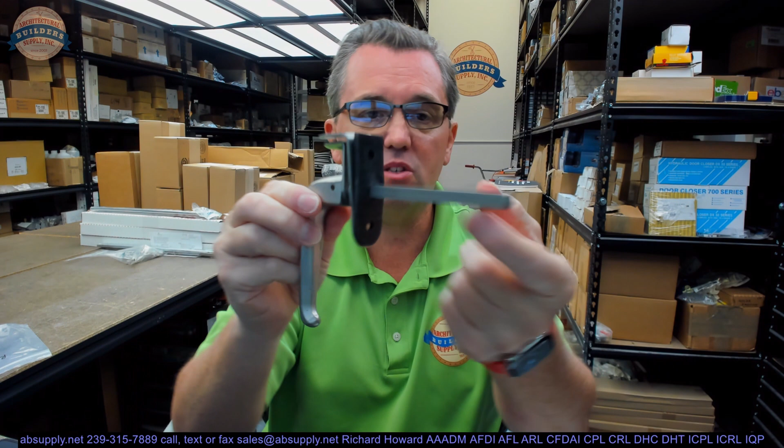The exterior handle is going to be comprised of the handle itself, obviously. It has a roll pin through it into the stainless steel key stock or shaft. That has a specific length for the two-point latch application, where other units, this could be also known as an RPRS8SS or -1. The only difference between this and an RPRS8SS is simply the length of the shaft.

This is going to be right at about 5-inch shaft length, and that's what I'm calling it, 5-inch shaft length. Generally from the end here to the end, which is buried, of course, inside of the handle, but about 5/16 over from the roll pin. So about a 5 5/16 shaft length.

Admittedly, the factory is a bit, I wouldn't say cagey about publishing the information, but without asking, we don't know where this is used, although they supply that information upon request. The key stock diameter is 0.312 by 0.312, so 5/16 is the key stock size. You can, of course, padlock that from the outside.

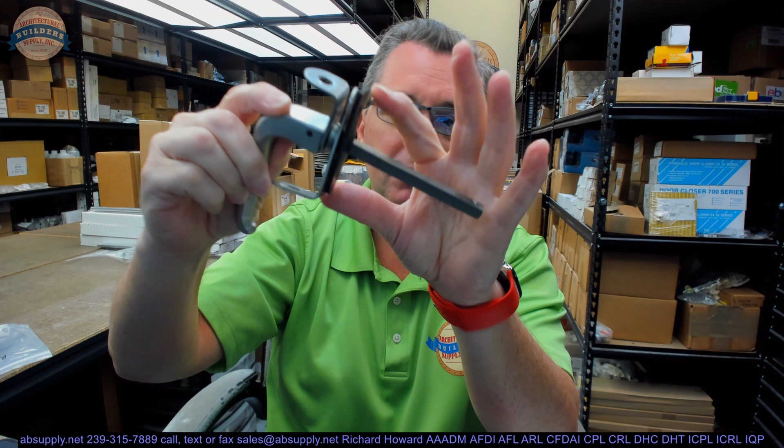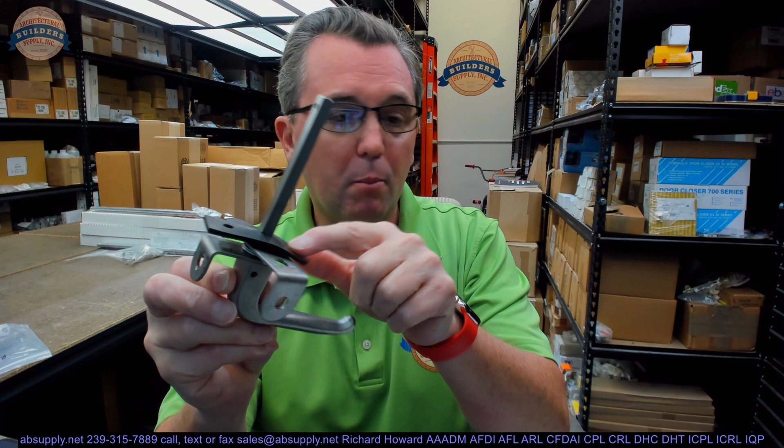There is a rubber gasket that is available separately as well. That might be an SD30. Let me look up that part number, see if I recall it correctly. Indeed, it's the SD30, and it is not uncommon for people to purchase the gasket only. That's just closed cell neoprene. It fatigues, it fails like everything else, and is something considered to be replaced.

We'll of course include the interior handle, and that will have a roll pin started in it, and you will get that pushed down into that hole that's been prepped there. The other item that is included in this assembly would be the fasteners. We've got a couple of hex cap bolts and a couple of washers.

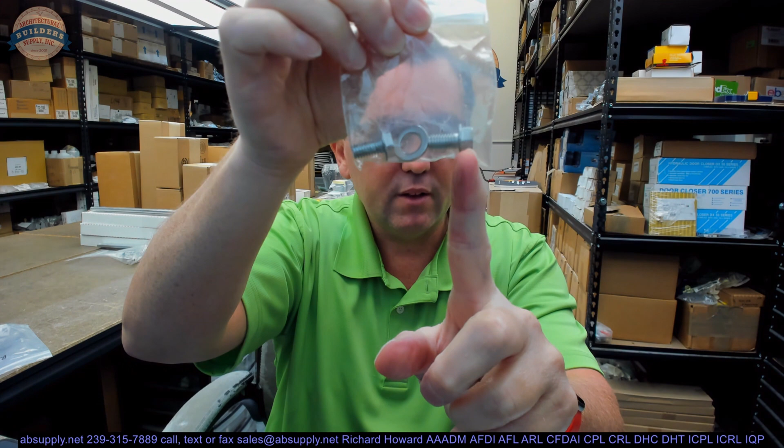Please note you have a thinner head and then a thicker head. The thinner head is going to be down in this area where those staples have to pass each other. The thicker head can go over here. That's how that works. Let's switch now to the screen view and take a closer look at the photographs and the supporting documentation.

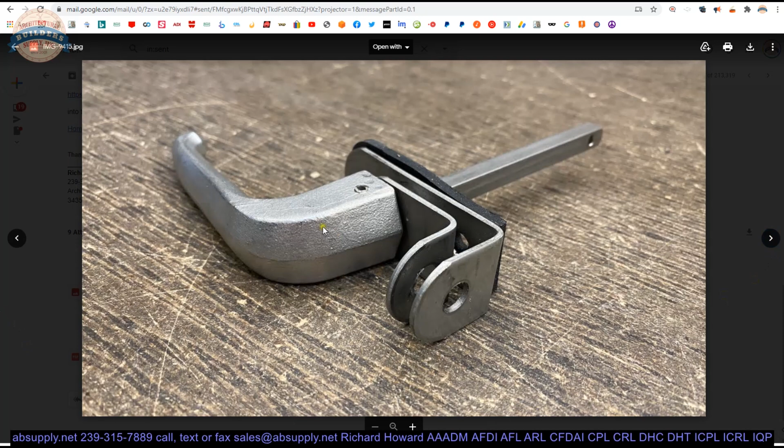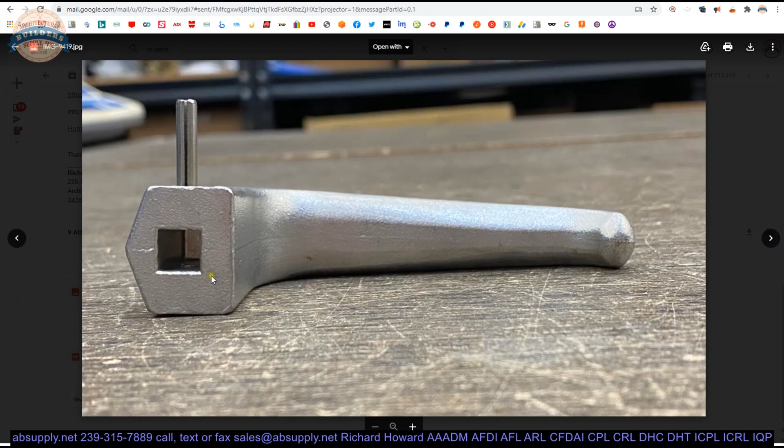Here is the item that we are looking at. The complete assembly, showing the handle, the roll pin, the gasket, the two hasps or staples, the SD30 gasket, the exterior only, the interior only, with a key stock and its roll pin, your screw fastener, the thicker head and then the thinner head.

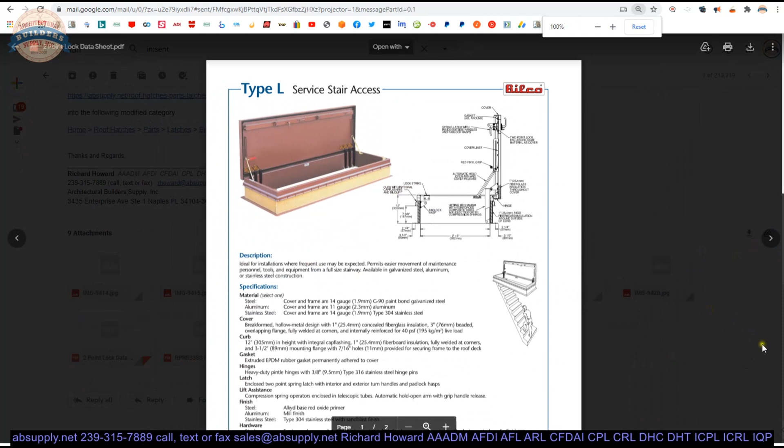Now, the L service stair access would be a typical application for a two-point lock, and here it is. So this assembly is going to be different than the typical RPRS8SS, and the difference really is just simply the shaft length.

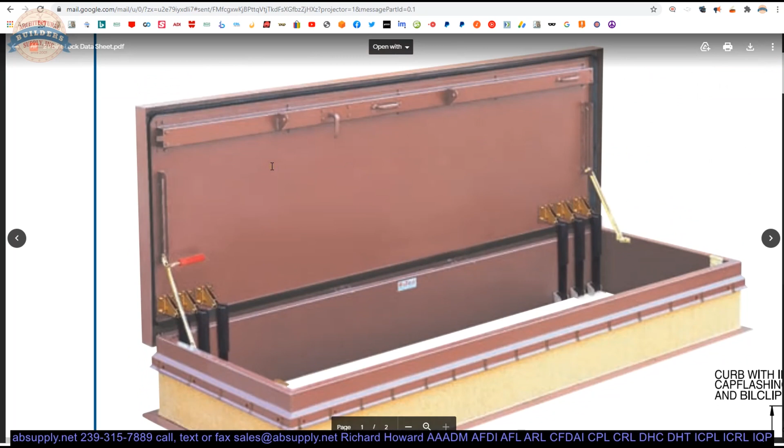Okay, so if you have a two-point latch, this is very likely the one that you need. How you'll know if it is for sure: if your unit is aluminum or stainless, this could be it. If your shaft length of the one that you're replacing is 5-inch, this would be it.

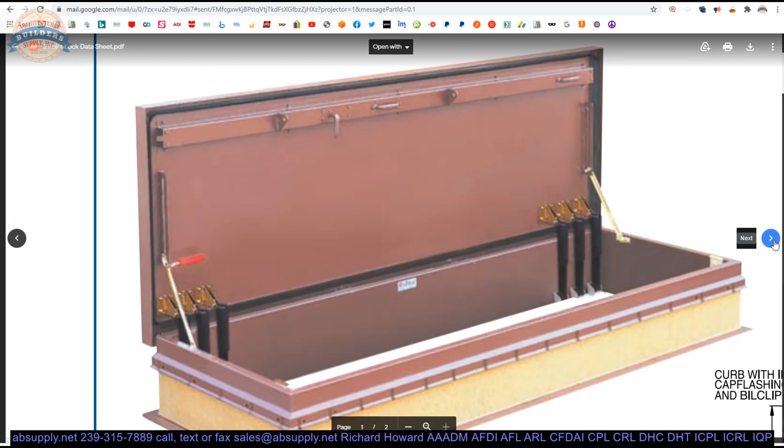Unfortunately, they don't produce a bill of materials for all of the hardware that goes on each and every one of their units. I really wish they did, because it would allow us, just upon knowing what unit the client has, to fulfill orders for correct, proper, original equipment as replacement parts. But unfortunately, they don't offer that.

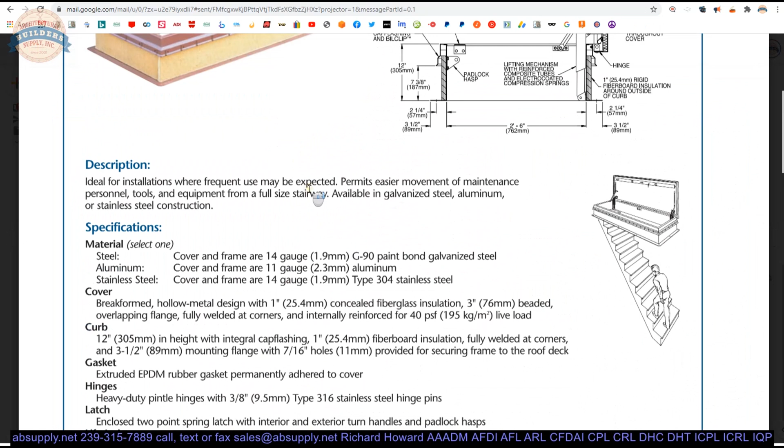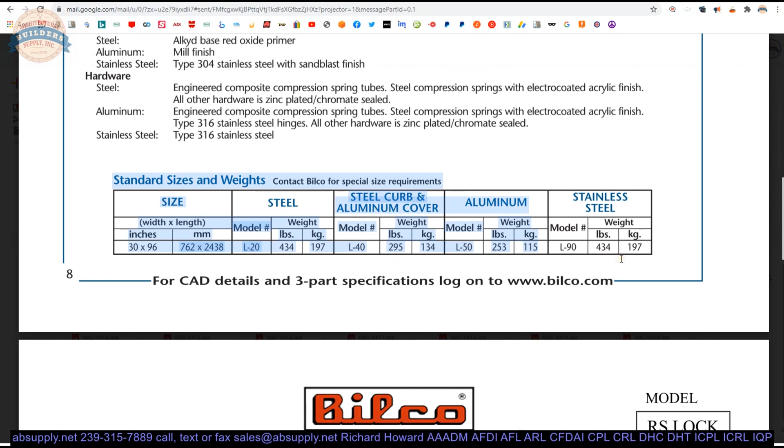Okay, this is the L shape, or the L style, made of steel, aluminum cover, stainless steel cover, the L series. The part number changes as the lid composition changes as well.

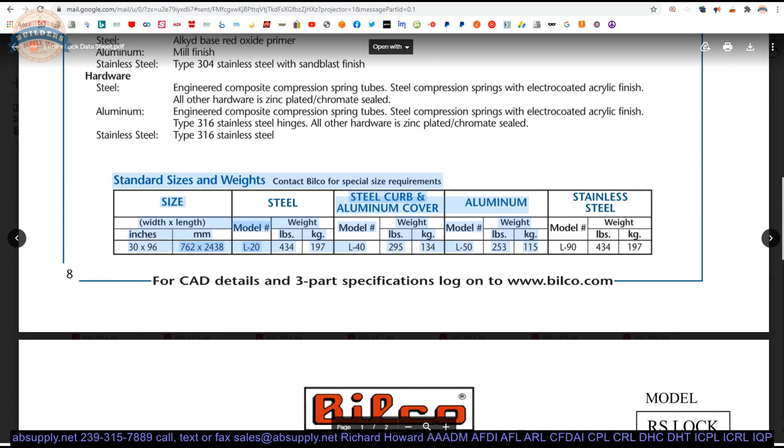Okay, and on page 2, a little bit of information regarding the 2-point latch. There's also the installation instructions that the factory has provided for this. They don't really apply directly because this is a 2-point latch. That's a RPRS7 that you see there.

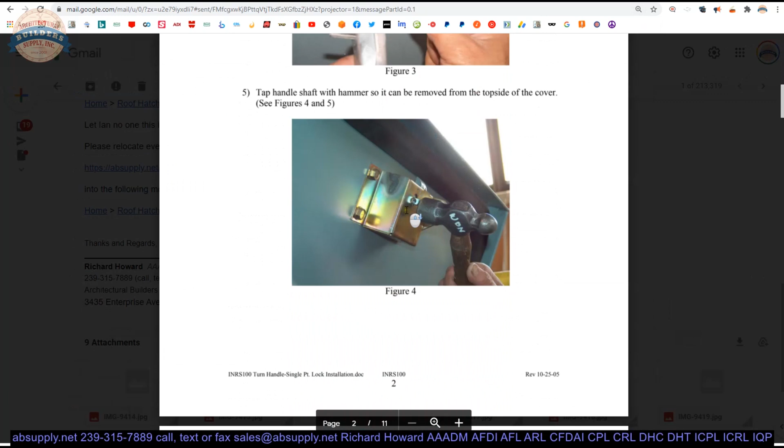But they do apply because they show you really how to drive the roll pin out or in order to get it swapped out. So, you know, it's not the exact latch handle assembly that you would install, but it would certainly give you a leg up in terms of understanding how it is to be installed.